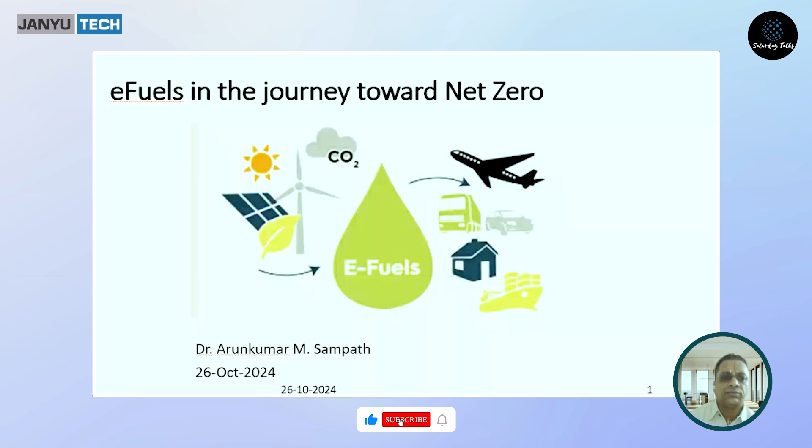So what you notice is in the last... Sir, the slide has not changed. I've not changed the slide. Okay. Are you on the? I'm on the second slide. Sorry, you're showing the first slide. This is the problem, there is a network issue. Can you see it now? Yes, sir. Now it's visible. Okay, looks like there is an issue. Okay, I will just keep it like this.

So what you notice is there is a significant amount of global emissions over the last 60 years that has been increasing steadily, and in the aviation industry it is very difficult to reduce the emissions. Okay? So the only grace for us was during COVID, when literally the entire world shut down. There was almost a 5.48% year-over-year drop in GHG emissions. And what you notice is the total GHG emission from fossil fuels and industry has reached a record high of 37.55 in 2023.

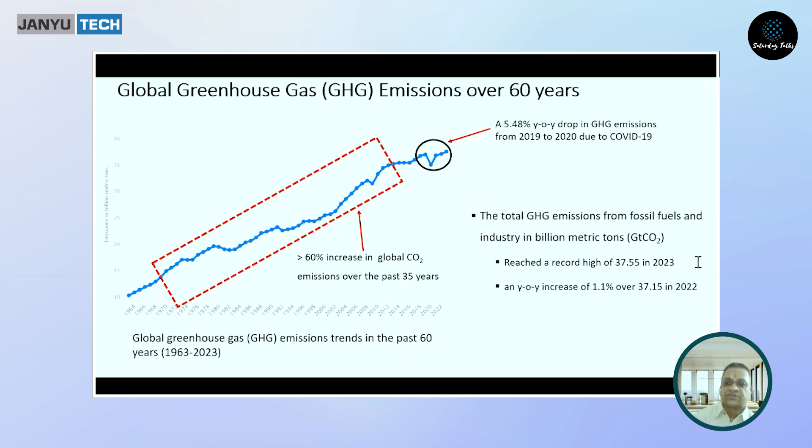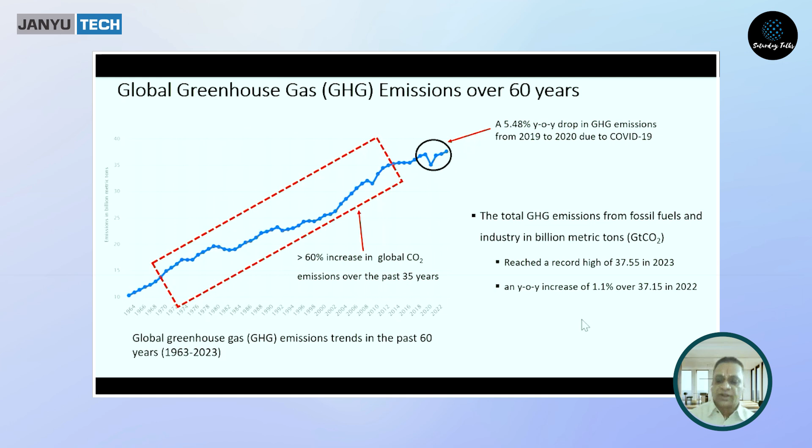So all of us are very much aware of climate change. All of us are very much aware of excessive rain, floods, etc. that have been happening around the world, not just in India alone. It is a direct implication of climate change. And this is the background information. Now, in the next 2 weeks, there is going to be a COP meeting again in Baku, Azerbaijan, where India will also talk about its achievements towards net zero.

In fact, you may have noticed in the last couple of days when the BRICS meeting was held in Kazan, Russia, it was primarily India and maybe China that have reached most of the targets that we have committed. The developed world is far behind with respect to reaching the emissions targets, because they have taken specific targets, let's say net zero 2050 or net zero 2060, and they are significantly delayed. Number one. Number two, they also agreed to commit funding, and even on the funding front, there are lots of challenges.

I'm on slide 3. Can you see slide 3? Yes, sir. Okay, good.

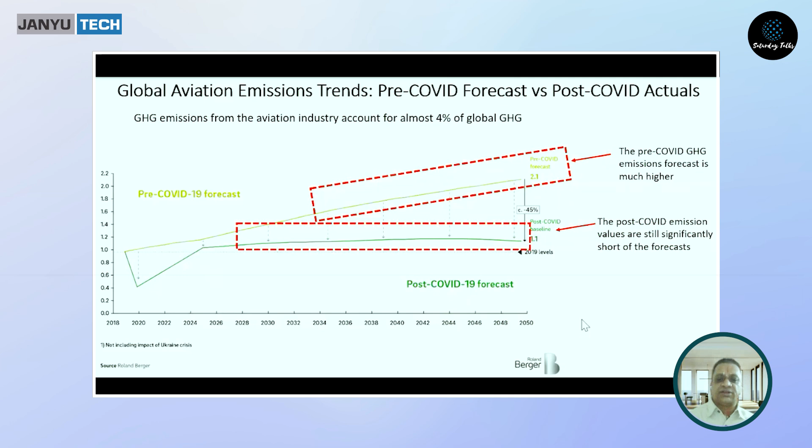So this is a graph produced by Roland Berger Associates. I had a chance to look at the report and I got this. What you notice is pre-COVID, they actually predicted that the emissions will go up like this. Fortunately or unfortunately for us, COVID came and the emissions have actually significantly dropped.

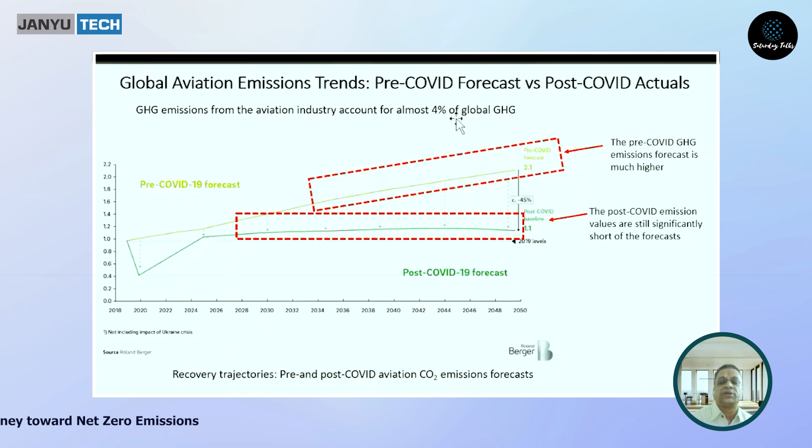As you saw in the previous slide, there has been a 5.48% drop, and because of that, the emissions are still increasing. But fortunately for us, there's a big gap between what was projected and where we are today. Okay? But the numbers are still high. We have to go down significantly. And by the way, the aviation industry contributes almost 4% of the global greenhouse gas emissions. And at the same time, reduction of these emissions is very difficult. I will walk through those details next.

You may recollect that in India also, Nitin Gadkari has been pushing significantly for ethanol blending in the petroleum so that our import bill in petroleum could go down and we could also reduce the emissions. So you are very well aware of it. Something similar here, 2% is mandated in 2025 and this number is increased to 70% by 2050. In the sense, unless you do some things like this, you may never reach the 1.5 degrees Celsius goal that we have taken.

In fact, if we don't do anything today, sometimes we are literally at a point of no return. In fact, there was an article about a week ago that about 70 to 80% of animals are literally getting close to extinction and we are at a point of no return. Same with the Amazon forest in Brazil and Argentina, etc. We are literally at a point of no return because we have done so much deforestation. So there is a challenge for us that if we have to meet the goals with respect to net zero, we must act immediately. There is no more time.

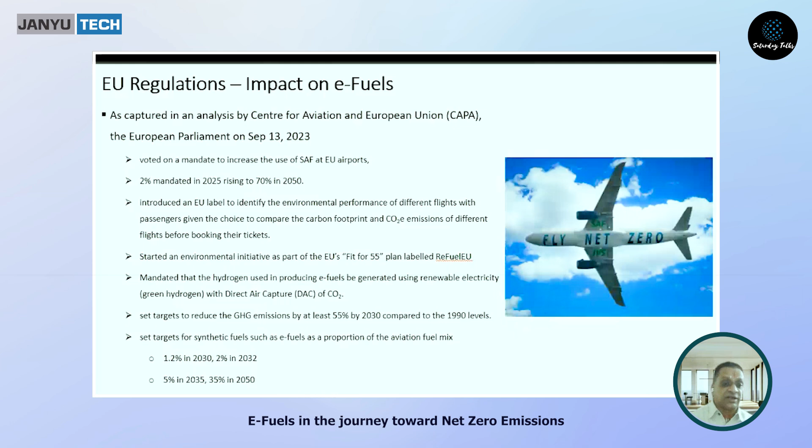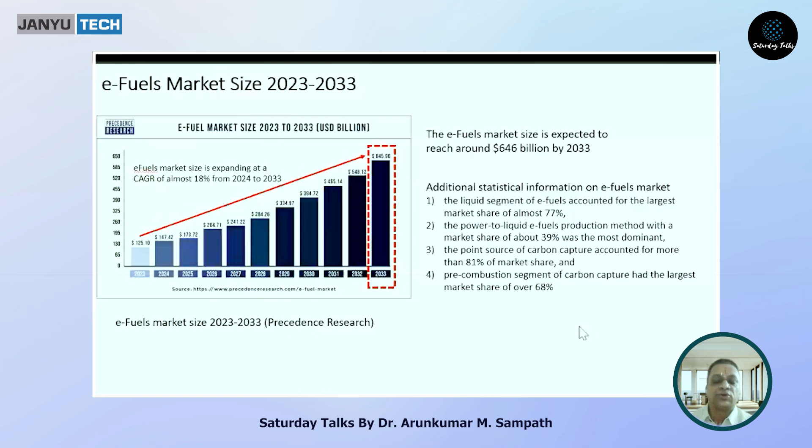Okay, that is expectation. Now, even in this, what EU says is, for example, the liquid segment of e-fuels accounted for almost the largest market share of 77%. For example, it is not the liquid hydrogen, but it is the methanol, ethanol, etc., the liquid fuels that have been blended with the current aviation fuel. The next thing is the power to liquid e-fuels production method with a market share of about 39% was the most dominant. Means they have been producing different fuels such as methanol, ethanol, propane, e-kerosene, etc. from renewable energy sources and direct air capture and all. So that the market share has been almost 40%.

Okay. Now the next one is there are very clear challenges. As I told you, aerospace industry, especially the airline industry, because they carry huge number of passengers internationally. And as you know, the sizes are only increasing, the weights are only increasing over long distances. Today, some of the longest flights are 14 hours, 16 hours at a stretch. For example, Singapore to San Francisco, Bangalore to Los Angeles, etc. If that flight has to travel for 16 hours, it must carry so much of fuel and it should burn the fuel.

The good news is because they cruise at a very, very high altitude, the fuel efficiency at those heights is quite good. In the sense they are not coming down, they are not going up, means landing, takeoff, etc. are not happening. So fortunately, in the long distance flights, the efficiencies are better. But still, the emissions are there.

So the key success factors for the carbon emissions: even though we have, say, solar power or wind power or other sources of energy used for capturing and converting the carbon, the final investment decision, called FID, for producing new plants for direct air capture or carbon capture technologies is significantly depending on government incentives. For example, in US, Joe Biden has passed specific laws and specific budgets to significantly improve within America the capability to produce carbon using renewable electricity. So the plants are being set up, the regulations are being sought.

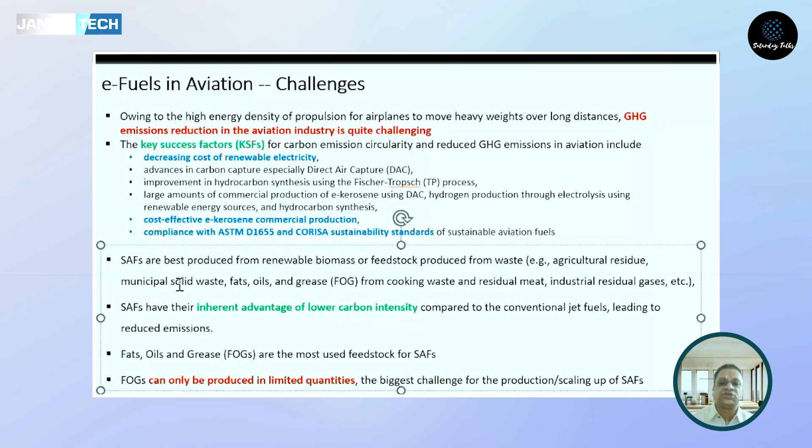In fact, India produces tons and tons of municipal solid waste. So there are specific processes and plants that can use municipal solid waste to convert this into usable fuels, etc. But today the biggest source of feedstock for this is FOG - fats, oils, and grease - essentially cooking waste and residual fat from meat processing plants, etc. These are being used as feedstock because agricultural residue has certain challenges, and municipal solid waste hasn't come to every place and isn't yet cost effective. So today FOG is the primary feedstock, but it can only be produced in limited quantities, so that is another challenge.

The inherent advantage of sustainable aviation fuel is that it has lower carbon intensity compared to conventional jet fuels - I will walk through that in the next few slides. And as I told you, FOGs are the most used feedstock, but unfortunately they can only be produced in limited quantities, so this is a challenge.

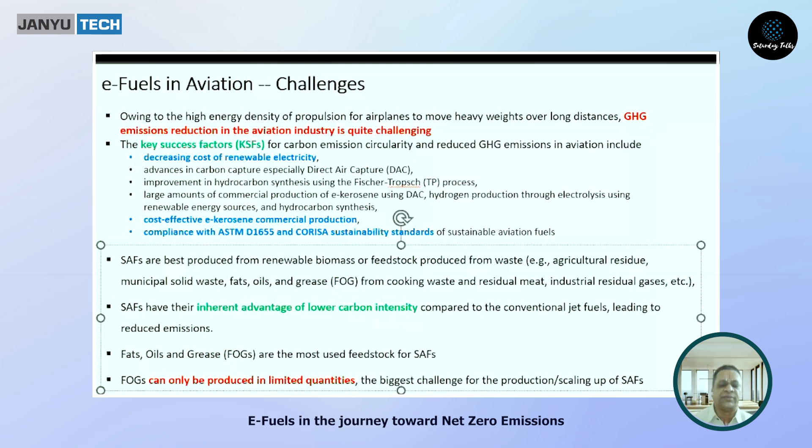So on one hand, the plants have not been built. Number two, regulations are still not clearing all those plants. Number three, because of safety issues, testing and compliance, there is absolutely no let-up - it has to follow the mandated procedure. Number four, you have a challenge with respect to FOG coming in limited quantity. So you have a bunch of different challenges to produce e-fuels in aviation and reduce GHG emissions from the airline industry.

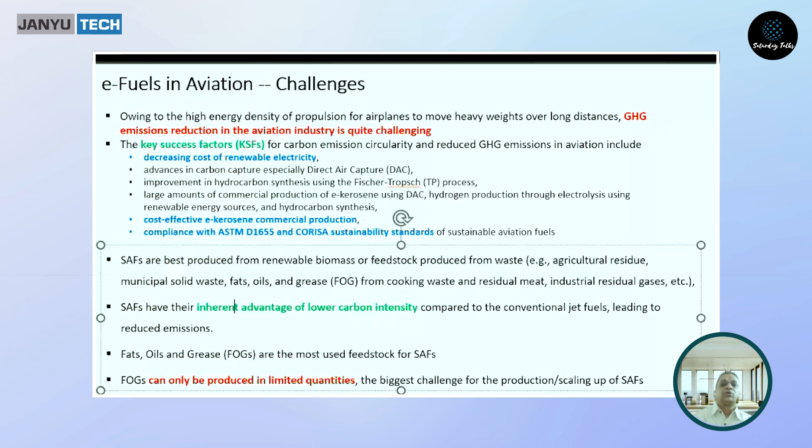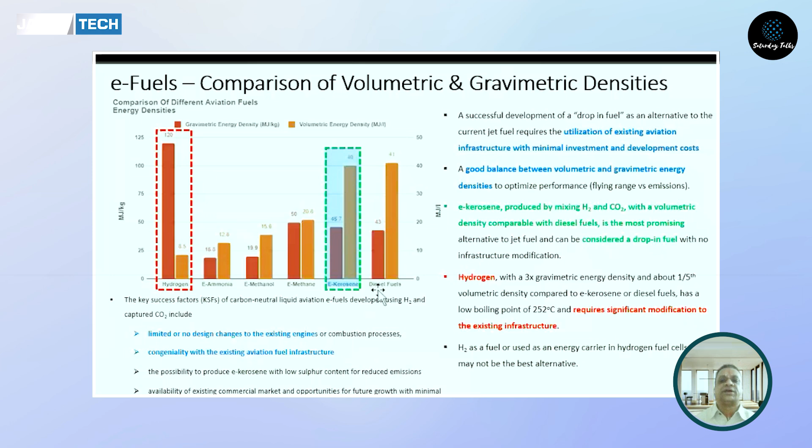Now, what you notice is - if you have to produce a fuel that will replace the existing fuel - this was the debate that Nitin Gadkari ji also had many times in the auto industry. So somebody may ask: why should we reduce emissions? And if we don't reduce emissions, what happens? And if we have to reduce emissions, how much do we have to reduce?

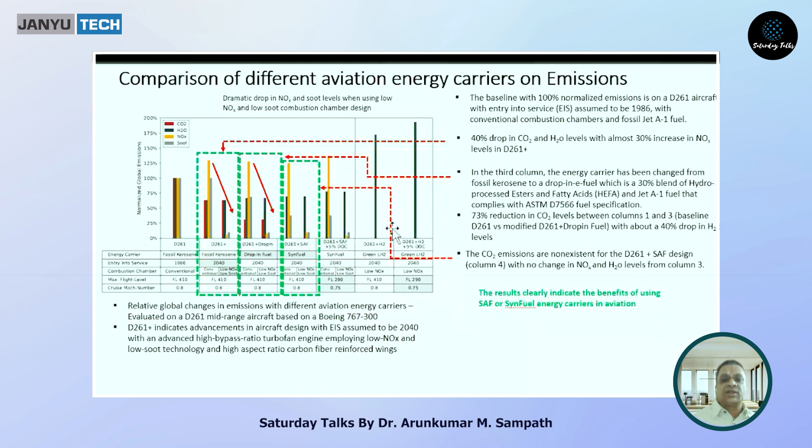Whether it is, for example, Blue Jet Air, Lufthansa, Rolls-Royce, or British Airways - all these guys have formed a consortium, and they are testing out these different combinations and then testing them in the labs. That's what they're doing. And of course, they are doing some limited trials, flight trials also, to generate data.

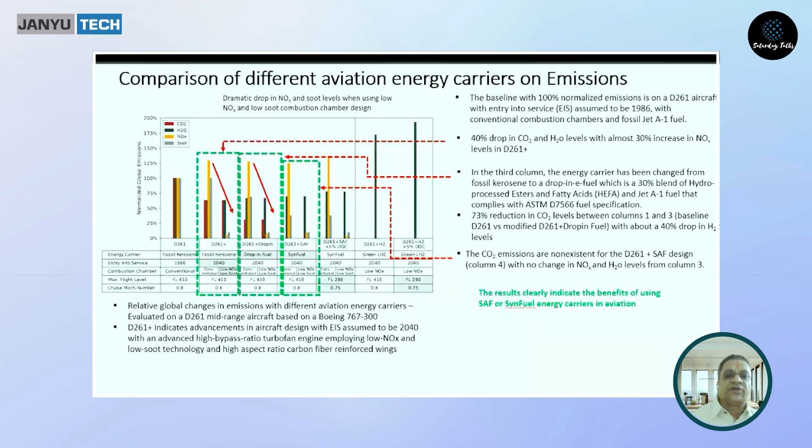Now, the next one, you will say okay, the experiments are fine. Now, if I have to mass produce the fuels, I may have a bunch of different options. The bunch of different options can give me different fuels with a different carbon content - of course, along with process efficiency, cost, etc.

So if you look at the sources, as I told you, the EU mandated that you must produce green hydrogen using renewable electricity, etc. Now, if your feedstock is, let's say, an industrial point source like a cement industry or a steel industry, or a significant amount of solar power or wind energy, or biomass, as I told you, the food, oil, FOGs, etc. - they could also be used as a feedstock.

Or in the case of Israel, for example, they are doing a significant amount of desalination because they don't have much natural resource of water. So they do a lot of desalination. And from the desalination, what can you do next? That is also being used as a feedstock.

Let's say you have a Reliance refinery in Gujarat. What you notice is it produces a bunch of different fuels, let's say propane, methane, ethane, diesel, kerosene, and all. So you have intermediate products that you can produce. Now from here you have to produce what is called the e-fuels, meaning essentially e-kerosene or gasoline or diesel or liquefied hydrogen, etc.

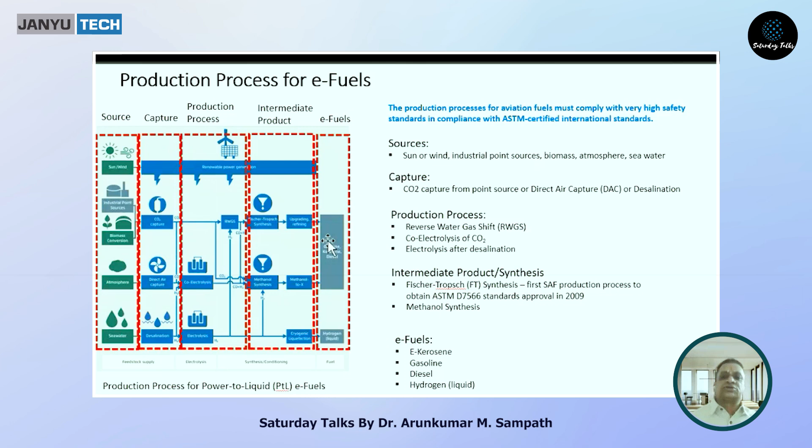So you have a bunch of different options with respect to feedstock, process, electrolysis, and output. Of course, the production processes are there, and there are specific syntheses being done. But at the end of the day, there has to be a certification that this sustainable aviation fuel will comply with ASTM D7566 standards. This is the standard mandated by the airline industry. So you have a bunch of different pathways, but they have to meet specific standards. That is the message.

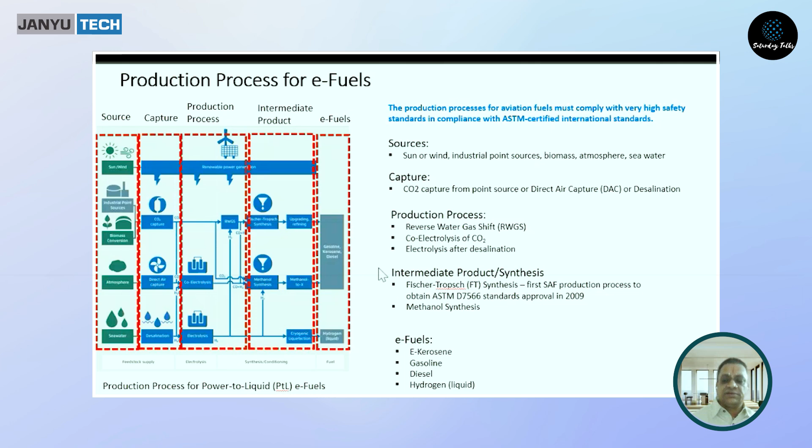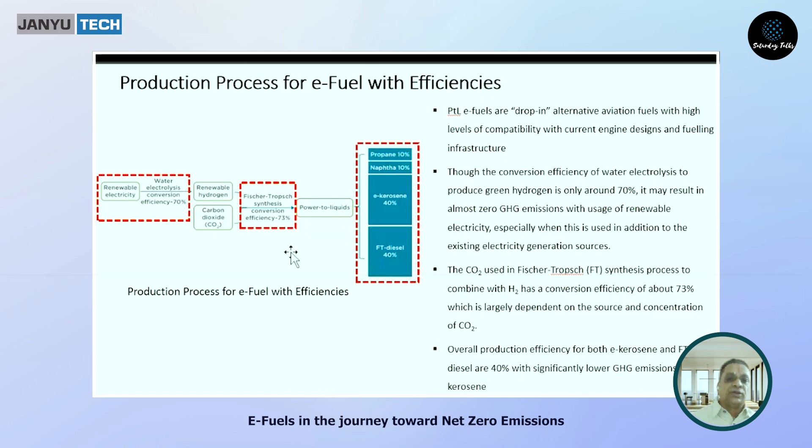Now, even though you may have a bunch of different processes, let us understand the efficiencies. Not every combination will give you the highest overall efficiency. With renewable electricity and water electrolysis, for example desalination, the efficiency is typically quite high, about 70%. But as you go towards renewable hydrogen, carbon dioxide capture, or FT synthesis conversion towards e-kerosene, your overall efficiency drops to around 40% for diesel and 40% for e-kerosene. If you are producing propane or naphtha, it is only like 10%.

So you may have started out quite well, but by the time you reach the end, your efficiency is less than 50%. The max you can get is say 40%. So the challenge is how do you identify the right combination that will help you produce the e-fuels. That is where the research is happening.

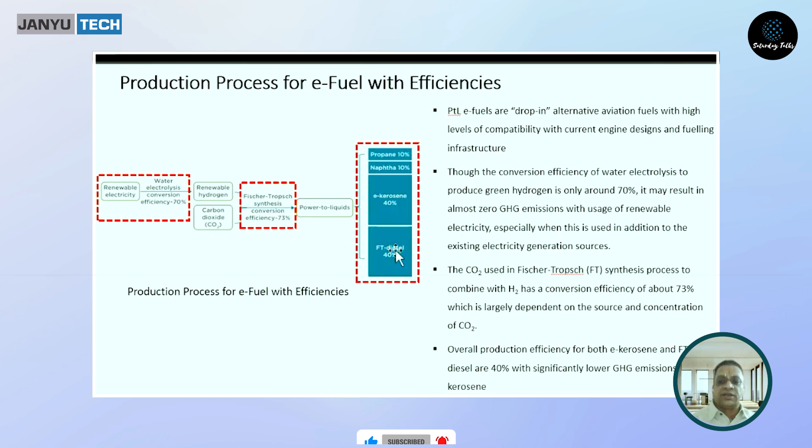As I told you, if you have to reduce the GHG emissions from aviation, the carbon demand has to go up, meaning you should be able to produce e-kerosene using carbon dioxide through the different processes I showed you in the previous slide. Accordingly, e-kerosene production should also go up. For this production to go up, your energy consumption will also go up. So there are a bunch of different implications. You cannot say I reduced my aviation emissions but I did emissions somewhere else. Obviously that is not net zero.

So the challenge for researchers is, even though you say you are capturing carbon dioxide and producing e-kerosene to bring down aviation emissions, you are burning somewhere else and increasing emissions somewhere else. That is a challenge. Even though the total CO2 demand has to peak and then come down from 2030 to 2050, your energy demand is also going up. Where? Significantly in the rest of the world other than Europe and the US, for example India, China, Southeast Asia. So that is one challenge.

The second challenge is the technology is not always mature. As I told you in the previous slide, you have different processes with different efficiencies, and they are at different levels of maturity. The TRL levels are different. Let us say you are working with a technology at TRL 3 or 4 today. How do you go from 3 or 4 towards TRL 7 or 8? This is where a lot of research, financial and policy push is happening, so that renewable electricity, e-kerosene production, etc., could be done.

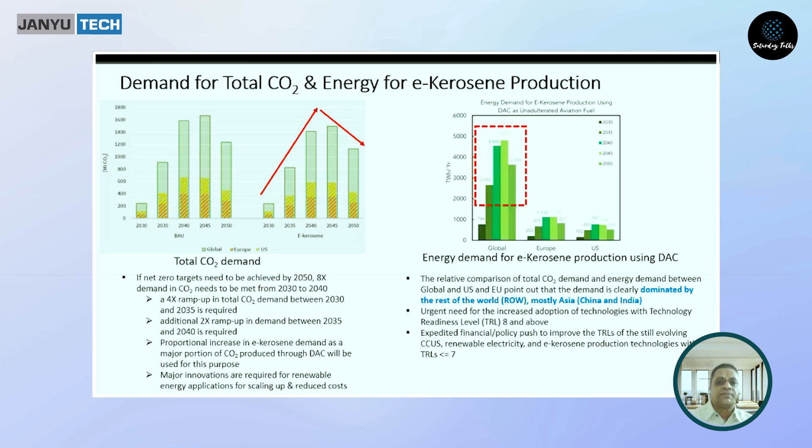So the next one is carbon capture cost. So previously we looked at the processes, we looked at the different feedstocks, we looked at different synthesis, for example, the process efficiencies and what is the demand that is required and all that. Now you say, okay, boss, all these are fine. Now what is the relative cost comparison?

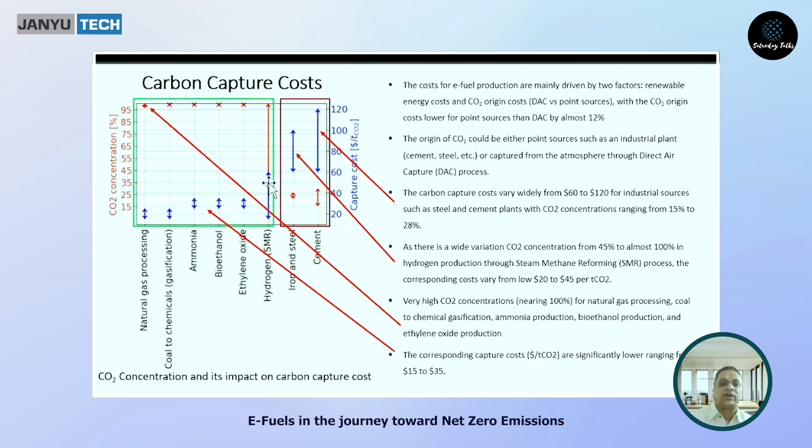In fact, you may be aware when Modi ji went to BRICS meet just a few days ago. Now he has struck a deal with Mongolia to import the coking coal from Mongolia because they noticed that coal is of high standards and they are able to import it. So that is also being pursued right now.

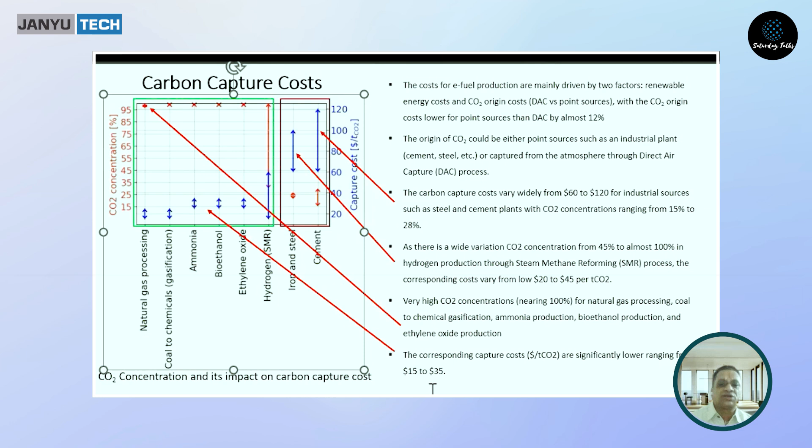So what you notice is iron and steel, as I told you, they have a decently good concentration of CO2, but the price varies. Similarly in the cement. So what this slide tells you is you cannot blindly depend on one particular process or one particular feedstock. There is a cost also involved with respect to that particular process. Okay, that is the takeaway. And the cost is directly dependent on the concentration of CO2 that is there in the source.

Now, you can say, okay, the costs are there. Now, EU, US, China, etc., they have started giving incentives to their companies so that they can produce the e-kerosene, etc. So, what is the trend going to look like? Because as you know, Reliance has started giving away literally very cheap data, and that is where India has started using UPI and a higher amount of data coverage, data usage, etc. in India, because the price has significantly come down because the scale is very high.

So, if you are able to do something like that with respect to e-kerosene production in US, EU, etc., compared to the current jet fuel that is already there, what you notice is there is a specific trend with respect to production cost. So, what this is saying is the production cost in US is significantly lower compared to the production cost in EU. You may ask why. That's because of two reasons.

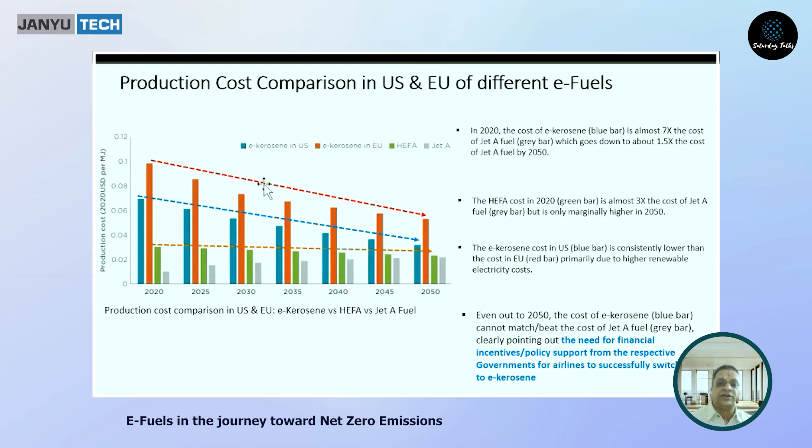Number one, EU as an entity, the renewable electricity costs are significantly higher compared to US. That is a fact. That is one of the primary reasons why the production cost of the e-fuel is going higher compared to the US. Okay, that is a fundamental reason. So researchers have identified this, and they are saying, okay, how do we incentivize for this renewable electricity to come down? Okay, that is one aspect.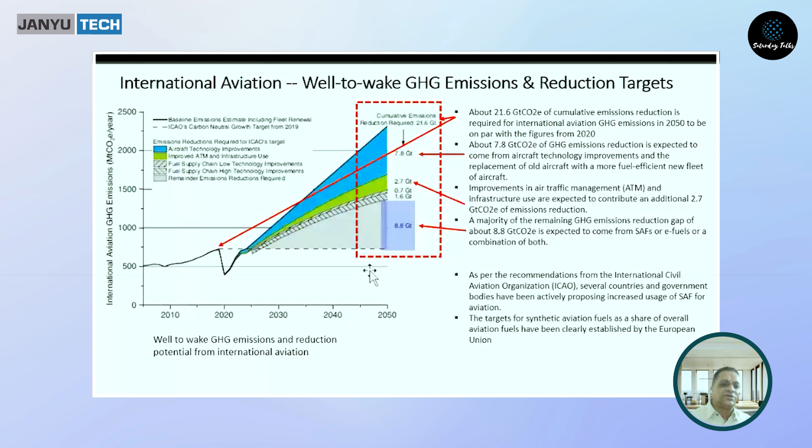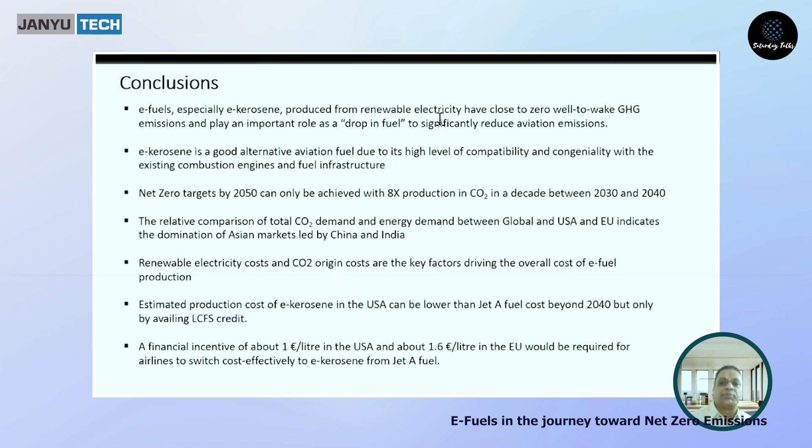You have no other choice, they must have. Okay? So the conclusions are: e-fuels, especially e-kerosene, produced from renewable electricity, have very close to zero well-to-wake GHG emissions, and they act as a drop-in fuel. As I told you, they have equivalent gravimetric and volumetric energy density, so it will literally act as a drop-in fuel compared to the existing aviation fuel.

The next thing is, as I told you, if you have to meet the net zero targets by 2050, let's say US, EU, etc., the CO2 production must go up by almost eight times. It has to go, and in the next decade, literally 15 years, it has to be 8 times. The second thing is, as I told you, the relative comparison of total CO2 demand and the energy between US, etc. and the rest of the world: almost 55 to 60% is being demanded by the rest of the world. For example, India, China, Southeast Asia, and all.

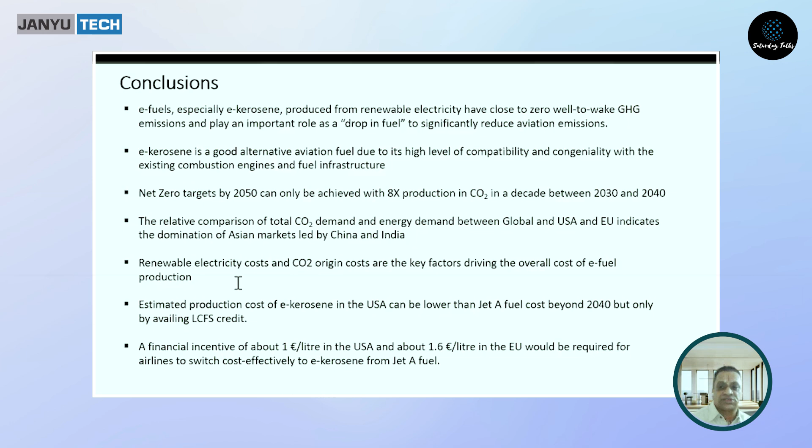Then, as I told you, the renewable electricity costs need to come down, and that will be a very key driving factor with respect to bringing the cost down. And I told you, unless you get a specific incentive from, let us say, US with respect to e-kerosene production, that curve can never cross the cost of the existing fuel. On the financial incentive, first of all.

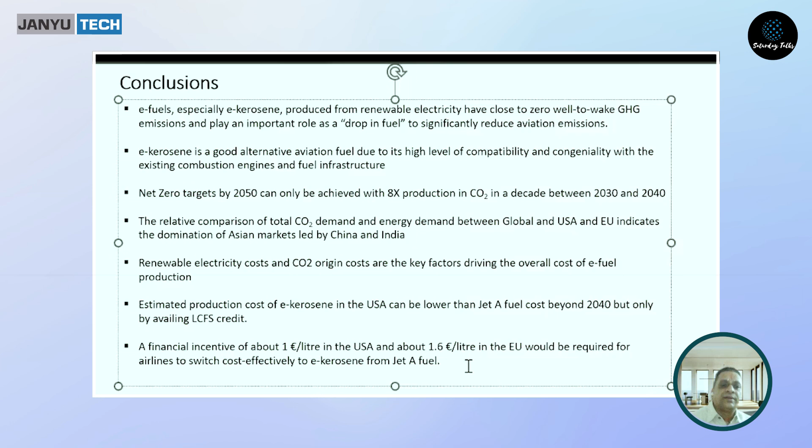Now you can say, okay, all this is fine. Now, what is the future work with respect to, let us say, now Biden has given you some money, or Norway has given you some money, or Oman or Qatar, these guys have taken gas credits and all that. Okay, all that is fine. What is next? What is next is, when you capture the carbon, not everything can be stored. So there must be focus on utilization also.

Utilization means, are there other forms that carbon could be converted into? For example, you could produce urea, you could produce methane, methanol. So that could also be done. So that is where the researchers are focusing on. Not just carbon capture alone, but also utilization, meaning how do you convert it into other products that can be used.

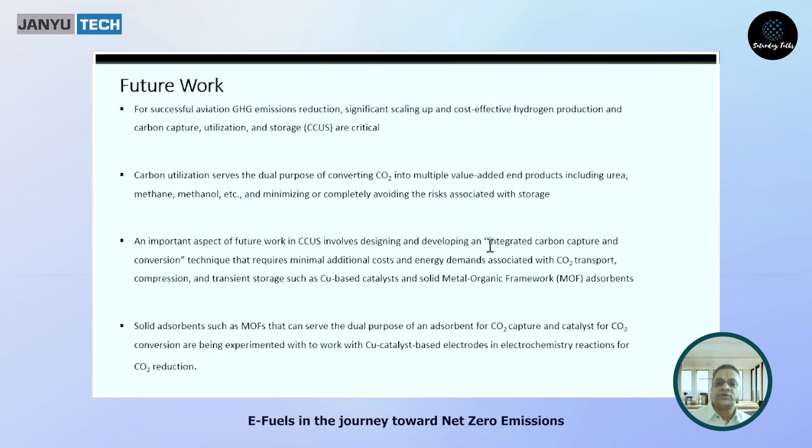The next thing is, because you have a bunch of different steps, as I told you with respect to the efficiencies, the overall efficiency is 50% at the end of the day. So the challenge for you is, can you integrate the carbon capture and also the conversion? Can you come out with some kind of a technique so that you have minimal additional costs? The energy demands are also being met, and you could use, for example, transient storage.

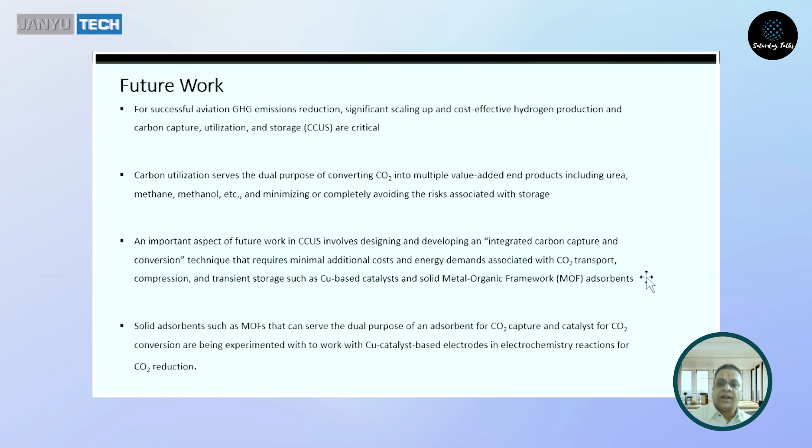You could use specific catalysts, let's say copper-based catalysts, solid metal organic frameworks, adsorbents, etc. So some of these materials could be used, and you can improve the process efficiency. So this is exactly where the research is going on. Whether it is Korea or Europe or Germany or UK or US, this is where the research is happening.

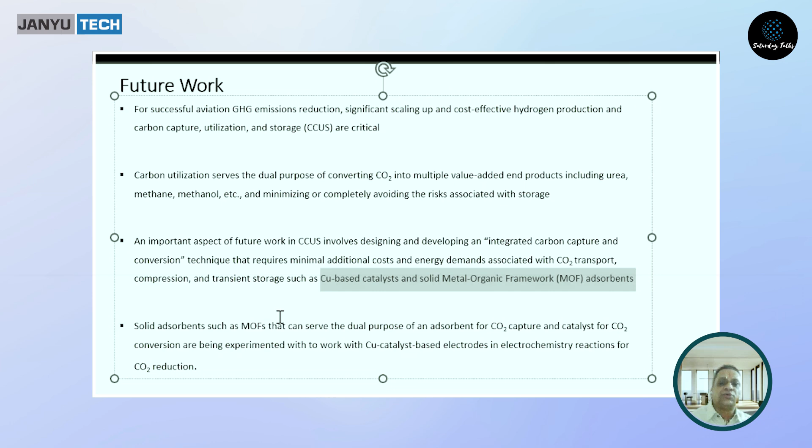As I told you, solid adsorbents can serve the dual purpose of an adsorbent for CO2 and also a catalyst for CO2 conversion. Meaning, as I told you, it could be both CC and also U. So these MOFs will help through all three of them, so that we are able to utilize copper-based catalysts as electrodes in the electrochemistry reactions for CO2 reduction. Okay, thank you very much.

I wanted to ask you, CBG is a very promising fuel for India, and I'm told that a lot of new plants are coming up, very micro plants all over the country. Is that true? And how much potential do we have? Can it cover the problem of carbon capture, carbon emissions?

Sir, today, as I told you, instead of e-kerosene, the world is trying blending. For example, even in the auto industry, Nitin Gadkari is trying to build what are called flex fuel engines and also do the blending. Even in the EU, they have mandated that you have to meet specific blending targets with the existing aviation fuel. So even if you have these micro plants, etc., at the end of the day, they will be utilized only for blending with the existing fuel.

Okay? You cannot have a drop-in fuel overnight, because, as I told you, the biggest challenge is the cost. So you cannot bring down the cost. So even if you have these plants, unless the costs come down commercially, they may not be viable. They can probably at most be used for blending with the existing fuel. This is my guess.